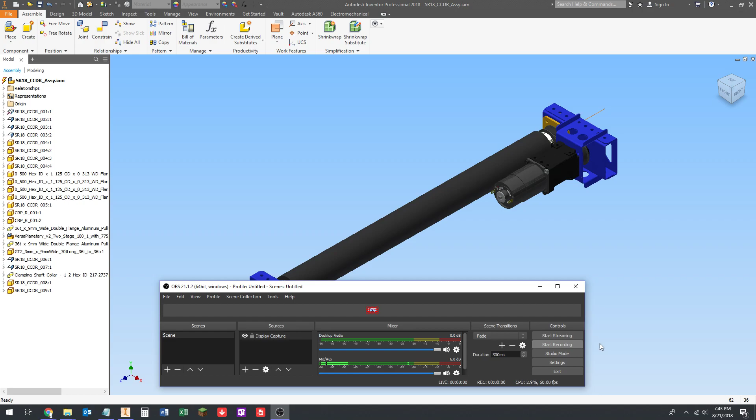Alrighty, we are back with our sixth and final part to this drum roller project for the Stellar Robotics 2018 CAD class. Basically what we're going to be doing is what we've done in the last video of the series of all of our projects: we're going to be adding the fasteners.

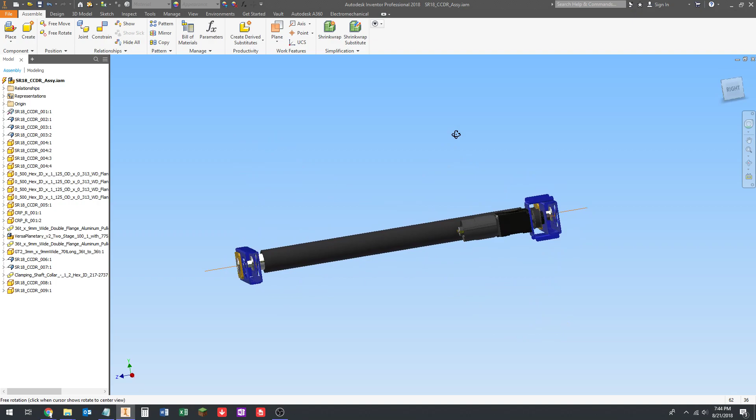Like I've said in the previous videos, we don't normally add fasteners to our CAD models unless they serve some really critical purpose that we need to be able to evaluate in the CAD model. But for the sake of completeness on these, it's a good idea to get in the practice of it for all these projects. And if we have a lot of manpower on the team, it's a good idea to add the fasteners if you can. It's just typically a waste of time if you don't have a lot of CAD people working. So we're going to do it. It really makes the CAD models look nice anyways. So let's talk about what we got to do.

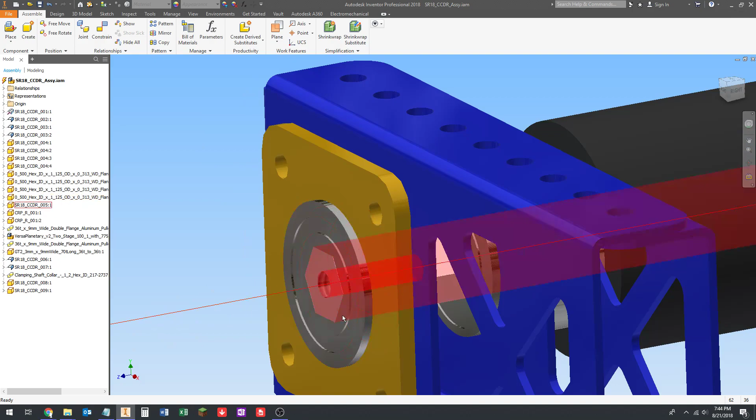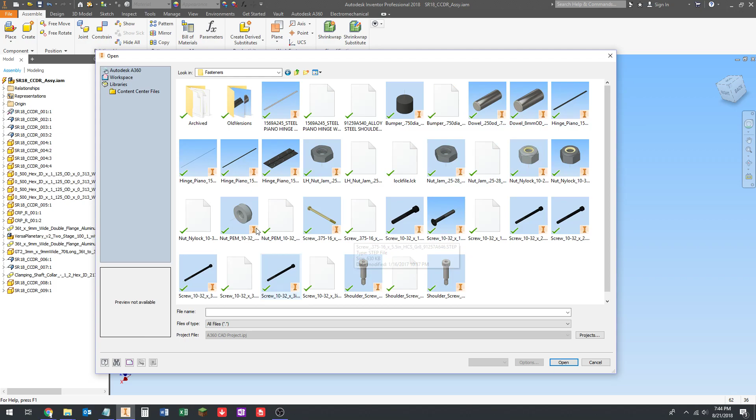So we know we've got to do a 1/4-20 button head and a washer. We've been using 1/2 inch long 1/4-20 button heads here, so we're going to do the same thing. We've downloaded these CAD models before. Normally, when you're working with standard parts, we keep a standard parts folder. I'll just actually show you. We just use Google Drive to keep our Stellar stuff. So we just have a standard parts folder. We've got like a fasteners folder. We kind of just dump random fasteners that we use in a folder. We got a folder for gears. Right, so we've just got a folder for a bunch of different parts.

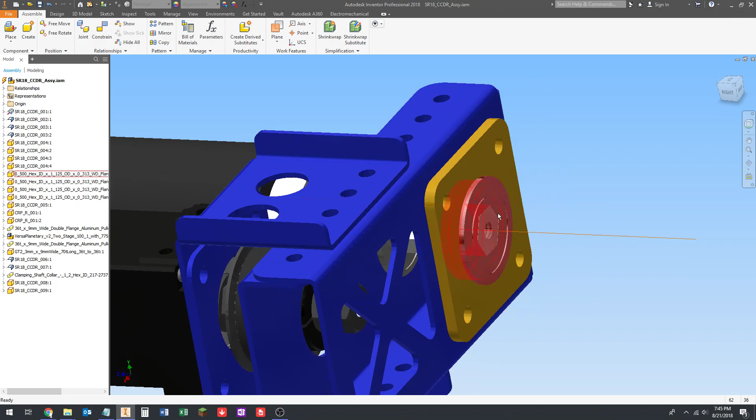And then every model that we do pulls from that standard folder. So normally during a season, you'll download a screw one time, and you won't have to download it again. If you've already downloaded that screw, for instance, you're not going to have to do it a second time. However, for the sake of these CAD class projects, I haven't been doing that. I've been re-downloading the files every time because the file management for doing that whole standard parts thing can get pretty tricky, so I don't want to bother doing it. So we're just going to go and re-download the CAD models again for those.

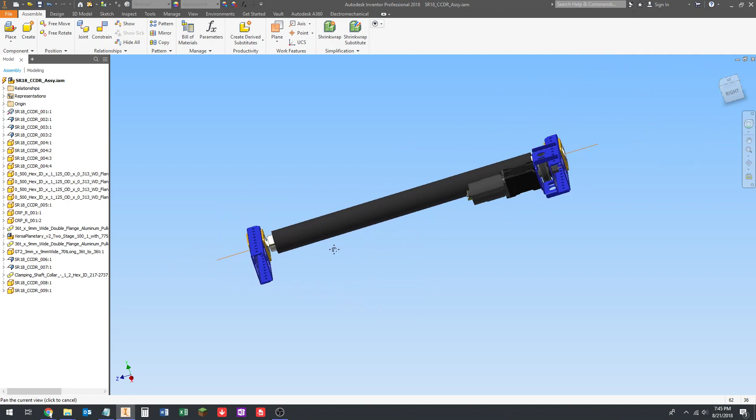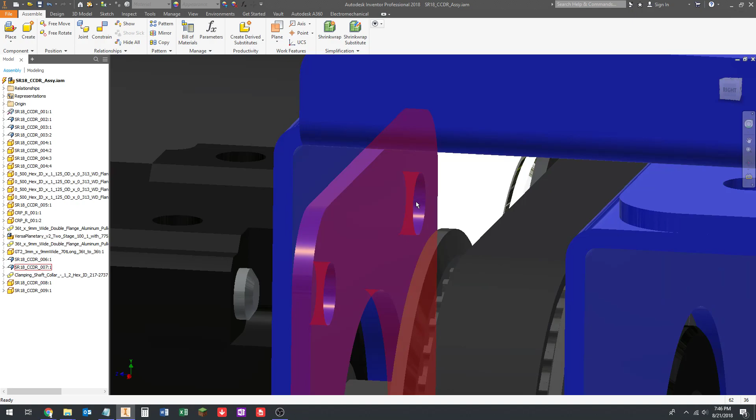And then we're going to need an 1/8 inch hex spacer in here. We're going to need a 1/4 inch hex spacer in here. And then we're going to need mounting screws for the gearbox. They're 10-32s. We're going to use socket heads, and I think we're going to use ones that are 1/2 inch long. That's what we usually do to mount these. I don't think we're going to put a washer under there. I hadn't planned on doing that. Sometimes you might want to. In this case, I don't think there's a reason to.

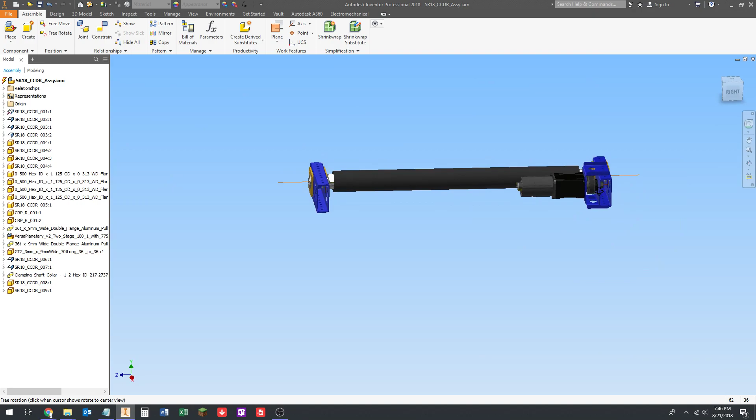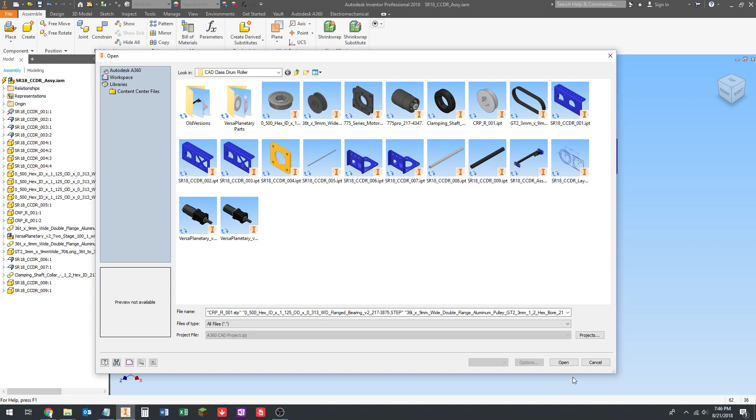Plus, we're kind of crunched for space to avoid interfering with this belt, so I really don't want to add any space in there. So, screw and a washer for this, a spacer over here, a spacer here, and a screw here. So 5 things, if I counted that correctly. If I didn't, it'll be okay. All right, so let's go to McMaster-Carr to download our CAD models. Actually, before I do that, I'm going to go back to Inventor. I'm going to just delete out the step files that we have in this folder already, because we're going to download 5 more, and I don't want them to get confused. So, all right, cancel out of that, go back to McMaster-Carr.

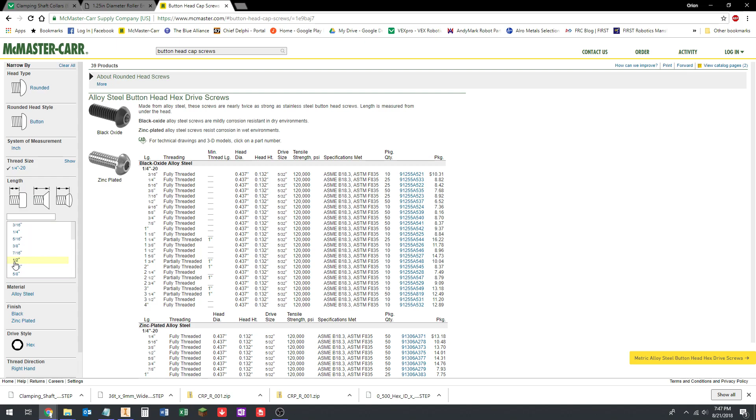All right, so button head cap screws is what we're looking for. They're going to be alloy steel button head cap screws. Yep. The thread size is going to be 1/4-20. The length is going to be 1/2 inch. It's going to be these black oxide steel coated ones. Click on the part number, click on product detail. 3D STEP is what you want in the CAD format. Depending on your browser and your screen resolution, you might have to scroll down to get to this. It might be down at the bottom of the page. I've got a 1080p monitor, so it shows up like this, but your computer, especially on your laptop, might show this page differently. So give that a save.

All right, so now we're just going to go up in the search box. We're going to do washers, general purpose washers. All right, screw size will be 1/4 inch. These 18-8 stainless steel general purpose washers are what we want. So click on the part number, click on product detail, 3D STEP, click save, and we'll move all these step files in at the same time.

Washer. Yeah, it should be okay. All right, so now we need a socket head cap screw. Yep, socket head screws, alloy steel socket head screws. There's all these different categories. I'm just clicking my way through. Thread size, I'll talk about something here in a second that'll be important. So 10-32 for the thread size, and the length will be 1/2 inch.

If you guys have problems, I'm just kind of blowing through this just because I want this video to be short, and we've downloaded these exact CAD models already. If you guys don't want to download some of these CAD models again, and you know you have a copy of that part already, for instance, left over from the gearbox project, you can just copy the files in. I'm fine with you guys doing that. I'm going through this again for the sake of completeness.

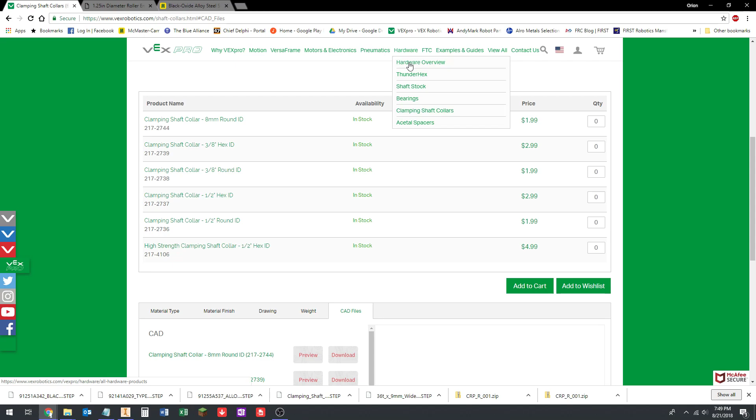All right, so now we need to go get parts. We need to get the 2 spacers that we need from VexPro. So we're going to go back to VexPro. We're going to go to hardware. It's going to be these acetal spacers. We used 1 or 2 of these in the gearbox project. We're going to scroll down to CAD files. So we need the 1/4 inch acetal spacer, 1/2 inch hex. Download that. And we need the 1/8 inch acetal spacer, 1/2 inch hex. Download that. All right, so we got 5 files here.

We're going to right click, show in folder, grab all of these, cut, and go back to our drum roller project folder, paste those in. Normally I would name these files something specific, but the only reason I would do that is when we put them in that standard parts folder that I showed you guys. So for the sake of this project here, I'm going to just leave these the names they are like we have been.

All right, so let's start importing all these. We'll import all of them, get them set up with the materials and all that stuff, and then we will constrain them all. So it looks like this is an acetal spacer, so bring this in, click OK, delete the sketch, set the material to acetal resin black. We're going to have to override the color. We're going to put an axis in the middle. We're going to go to solid bodies to fix the color. Right click on solid one, go to properties, clear all overrides, select the drop down, scroll up, go to as part, click OK. Just like we've done before.

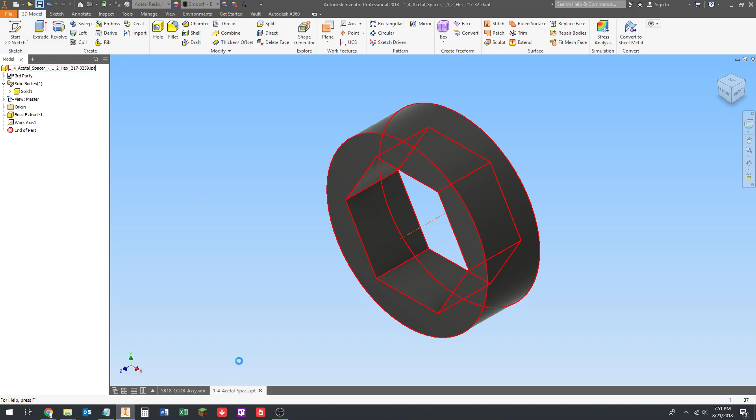I'm going to give that a save and close it. Open, go to the next one, and I've lost my thumbnails again. That's great. I need to get to the bottom of that. I think it must have something to do with either the video recording software or something to do with importing these files. It always seems to happen when I'm downloading something, but more likely it's probably something to do with recording.

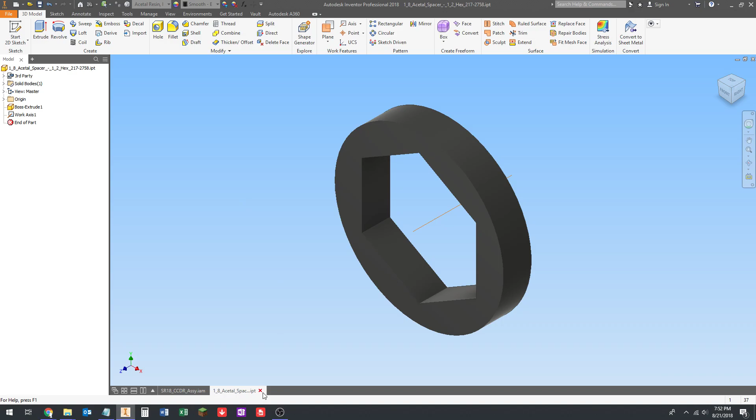Anyways, doing this again, this is basically the same exact part except half the thickness. This is the 1/8 inch one. So we're going to add a work axis, set the material to acetal resin black, and for some reason I didn't have to override the color on this one. I don't know why they were different, but give that a save, close it, open the next one. This is going to be our gearbox mounting screw.

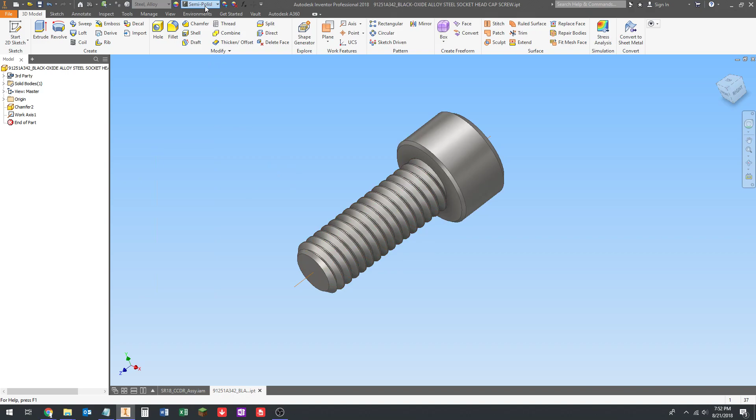Click OK. Delete the sketch. Okay, so we need a work axis. The round surface of the head will work, so click on axis, click the round surface of the head. Click the material drop down to steel, for steel alloy. Yeah, and then the color we're going to set to glossy black. Save that, close that, open, go to the next one.

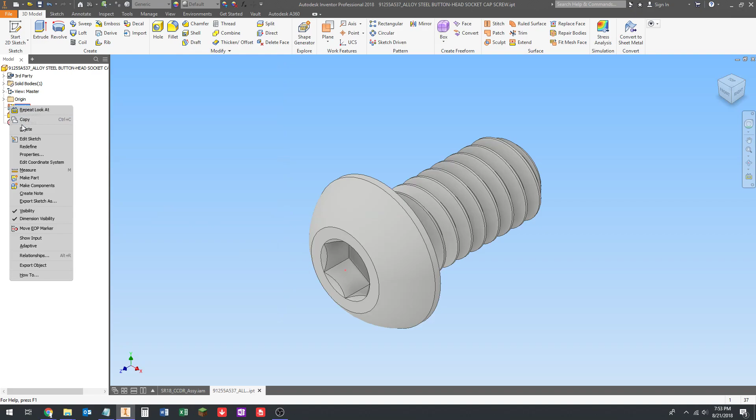This will be our retention screws for the end of the shaft. Click OK. Delete the sketch. Alright, so we need a work axis here. This surface right here works. Once again, alloy steel, glossy black for the color. Give it a save.

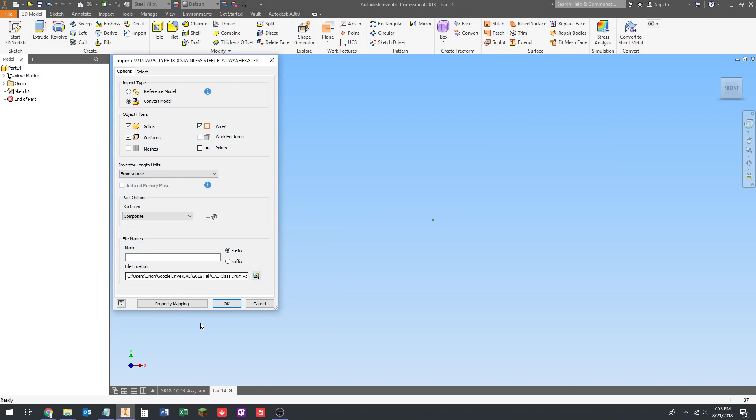Alright, the washer is the last one. Open that up. Click OK. Delete the sketch. Add a work axis. And a stainless steel. This is 18/8 stainless steel, which, if I remember correctly, is equivalent to 304. We're just going to pick that. It really doesn't make a difference.

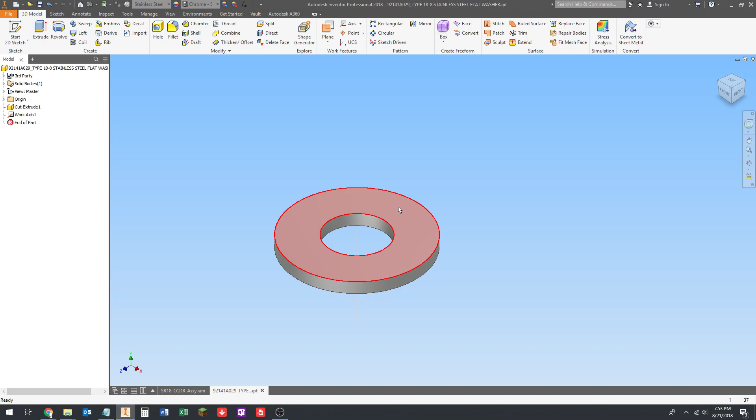It's making this chrome satin. I actually don't care. Normally this would be semi-gloss, but I don't care. So give that a save. Close out of it. All right. So let's start here. We're gonna put the washer on. We're going to put a washer on this end and a washer on this end, and then we'll put the screws on either end. We're going to be using insert constraints for this.

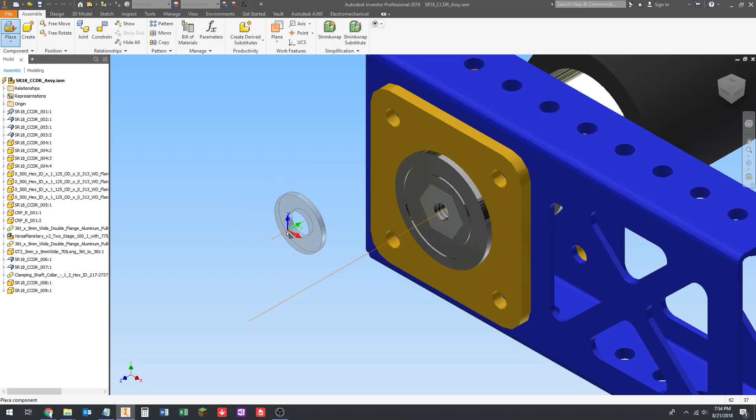So I'm going to go to place component, and I got to try to find this first one. Nice. Okay, so let's rotate this. I'm going to rotate it the other way. Once again, I explained why I rotate things like that in an earlier video, just because of the direction I expect it to be facing. So do that one, and then I'm going to just rotate it around. It's less important for imported components, but it's kind of just habit at this point. It's kind of up to you whether you want to do that or not.

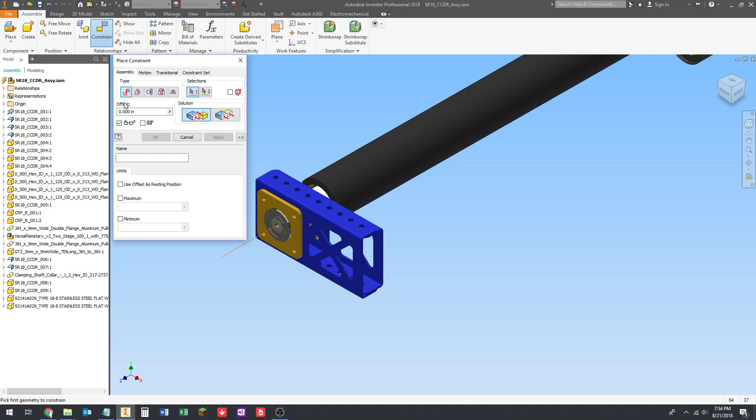All right, press escape to get out of that. Go to the constrain tool, go to insert, pick that side of the washer and the edge of this hole and apply. Where to go? Oops. Pick that. You can pick the inside or the outside circle. It really doesn't matter. Pick the edge of the hole and click apply.

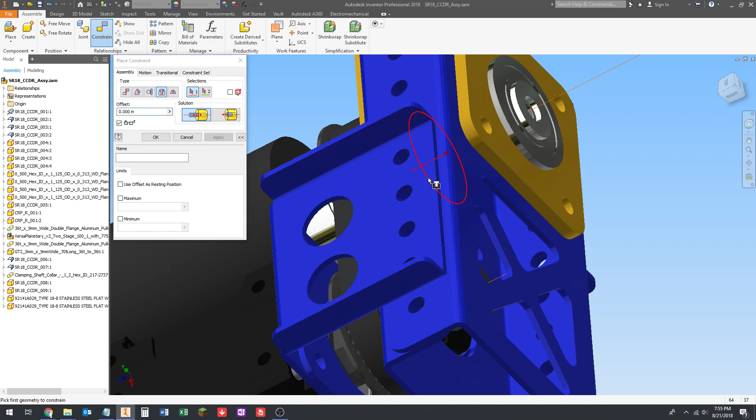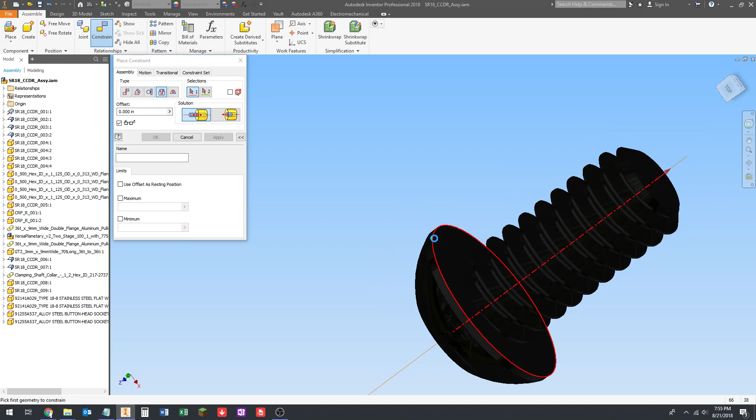Alright, so now we're going to place component again, and that's the socket head. That's the button head. Got to do this without previews. Rotate this around. So we've got one on either end. So we're going to go back to constrain, go to insert, pick this circle here. It's a little hard to see because it's black. It's even harder if I hadn't picked glossy black. You wouldn't be able to tell, which is why I use glossy black, even though these fasteners aren't particularly glossy.

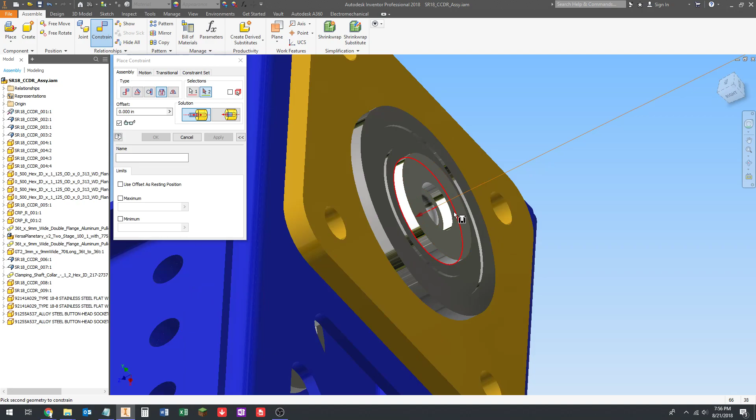All right, then we're going to pick the hole of the washer, not the hole of the shaft. The hole of the washer could be the outside one or the inside. Doesn't make a difference. All right, then we're going to pick this ring at the underside of the head on the other one and do the same thing. Okay, so that's all well and good. All right, so now let's put this spacer in here. That should be fairly straightforward.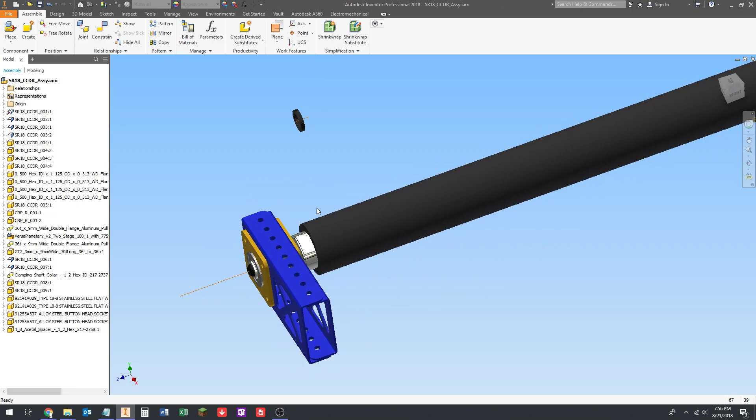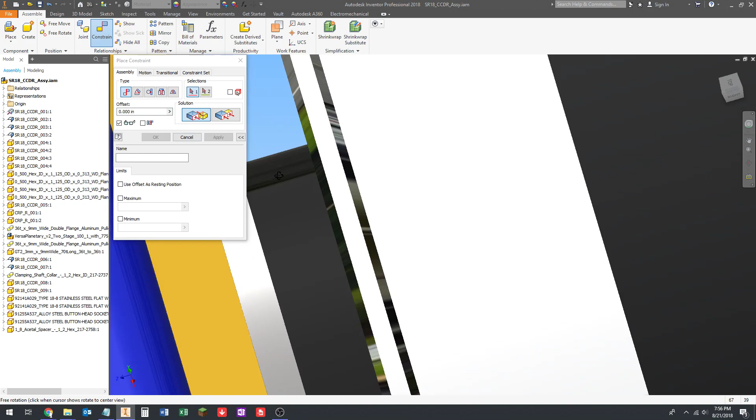It's going to be this 1/8 inch acetal spacer. All right, technically there's a way to use the insert constraint on this, but I'm not going to do it because I don't want to deal with it. So constrain, I'm going to constrain the work axis to the axis of the shaft. And then I'm just going to constrain one side. You can either constrain one side to the end cap, or you can constrain it to the bearing. I'm going to constrain it to the end cap. And you can see that it's just the perfect size to fill that gap. It's almost like it was designed that way.

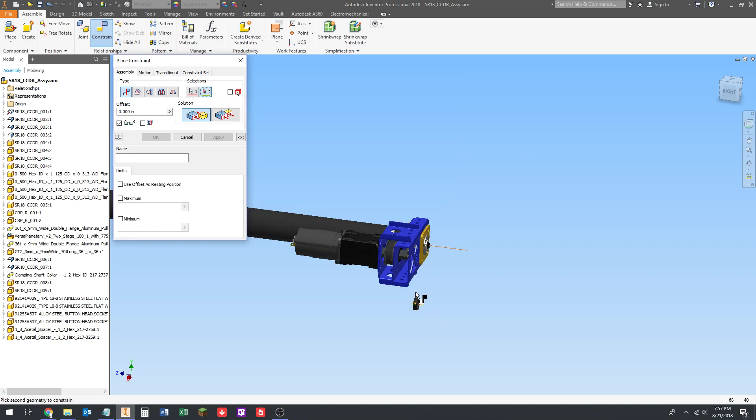Alright, so over here, we're going to do kind of the same thing. We're going to place component. We're going to grab the 1/4 inch one, place it down. We're going to constrain the work axis to the work axis of the gearbox, which is this guy right here.

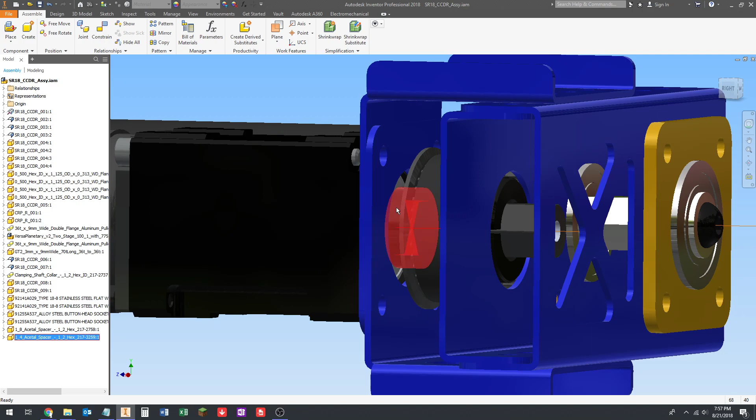Click apply. Then we're going to constrain one side of the spacer. We could either get in here and constrain it to the end of this gearbox hub, or I'm going to constrain it to the end of the pulley hub. And then we can kind of get in here and see that it should be relatively well lined up. I'll show you a trick that will help us confirm some of this stuff once we're done.

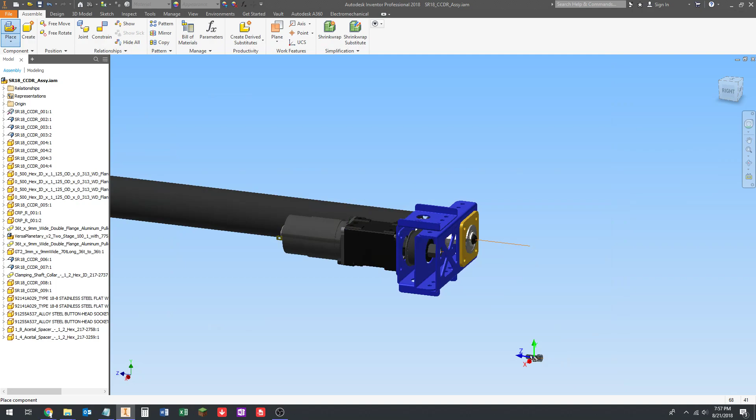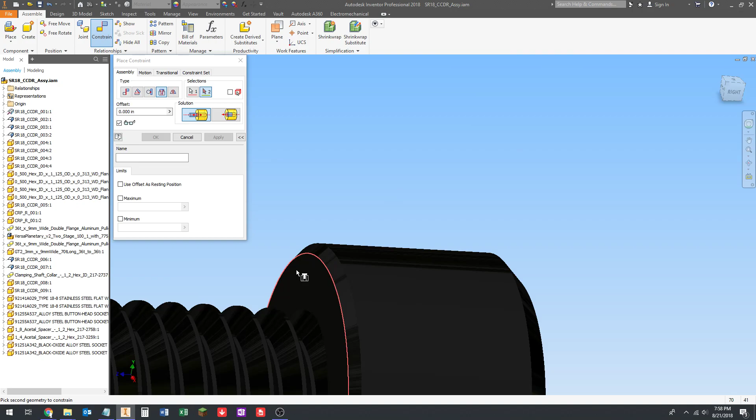So we got one more fastener to place. Let's place component. Should be black oxide alloy steel socket head cap screw. That's facing the right direction already, so we need one there and one there to go in this hole and that hole. So let's just pick the constrain tool, go to insert, pick, it can't be this circle, it has to be this circle, because there's a little bevel there. You need to pick the one that's closer towards the end of the screw.

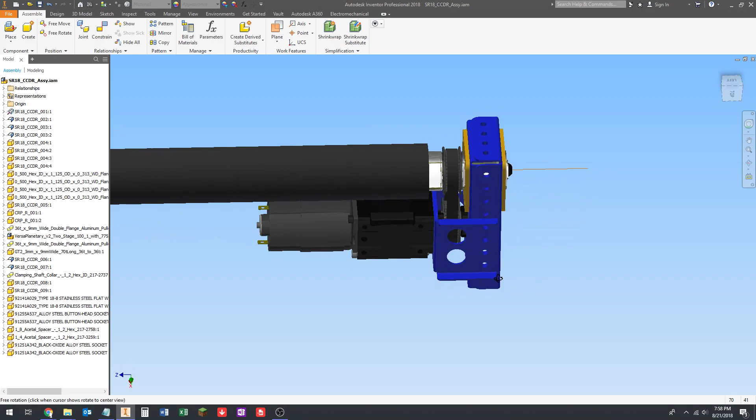Alright, and pick the edge of that hole and apply, and edge of that fastener to the edge of that hole and apply. All right, and that's it. That's all the fasteners. Other than that, most of the other fastening done in this assembly is accomplished with rivets. The bearing blocks are in place by rivets. All the structure is with rivets.

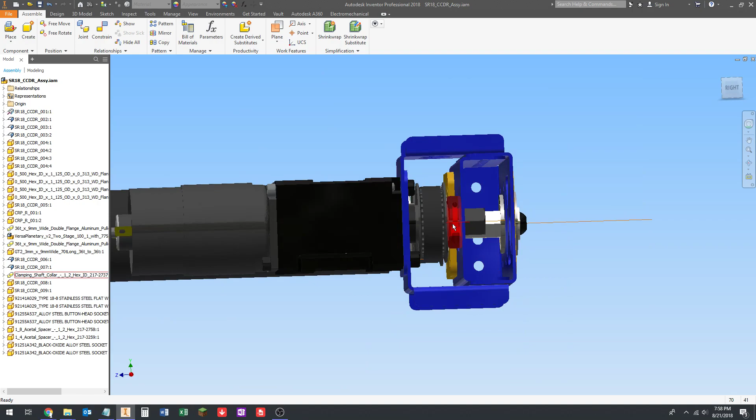We obviously have the shaft collar in here, which technically is a fastener. However, it's an important enough fastener that I would never leave a shaft collar out of an assembly. I would always put the shaft collar in. Whereas in a lot of cases, I would leave spacers out, and I would leave these screws out just because of time, typically.

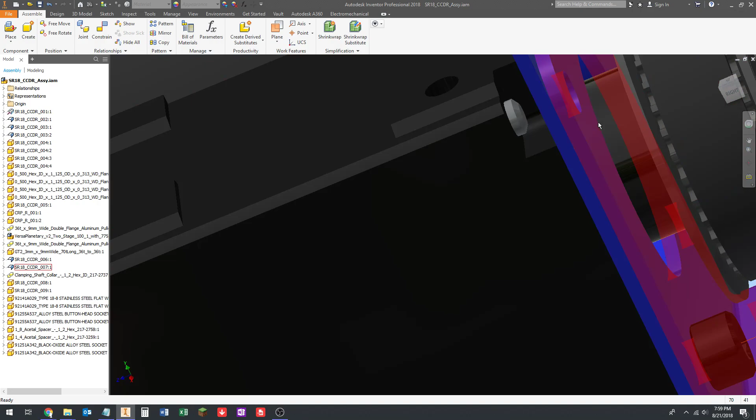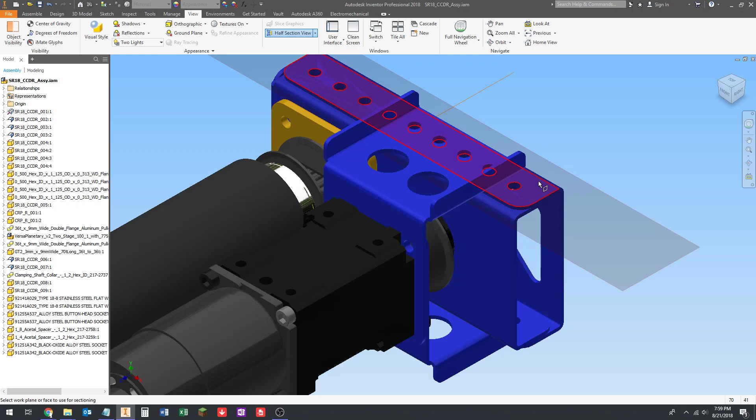So I wanted to show you guys just one other thing. Some of these fasteners in here, like this one, it's hard to tell if it's actually positioned correctly. So you can do what's called a section view. If you go to View, where it says quarter section view, click the drop down and go to half section view. Then basically you need to pick a plane. You can do this a couple different ways. You can click and drag on a plane, and basically you can cut the assembly.

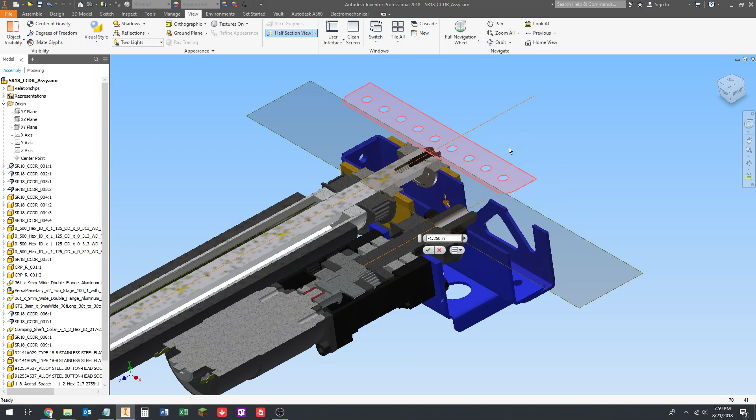You can look at it, and once you let go of the mouse, you can type in your dimension here. Now we know the distance from the top to the bottom of this is 2.5 inches. So 1.25 or negative 1.25 is exactly in the middle. You can also go to the origin, and you can pick one of these planes and use that to split it. Up to you. But if you click OK, it'll stay this way until you end it.

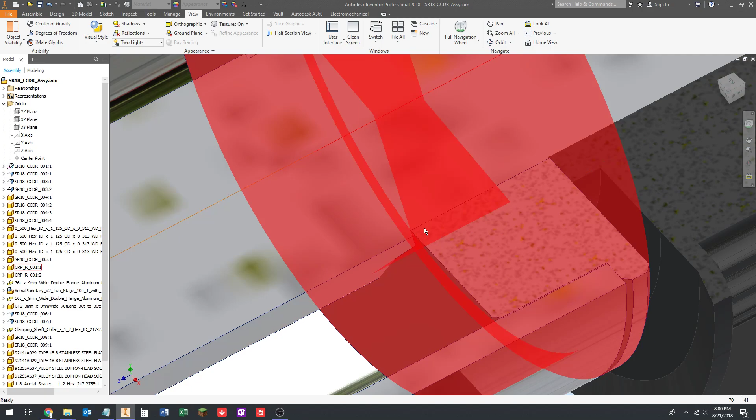So you can see, here, our end caps in place. And actually, sometimes it's helpful if you switch the visual style to shaded with edges, because then you can see the actual borders of stuff. The hexes look like they overlap because the hexes are not lined up. But you can see here, this is our gearbox, this is our pulley, that's our spacer. Everything's lined up just the way we want it.

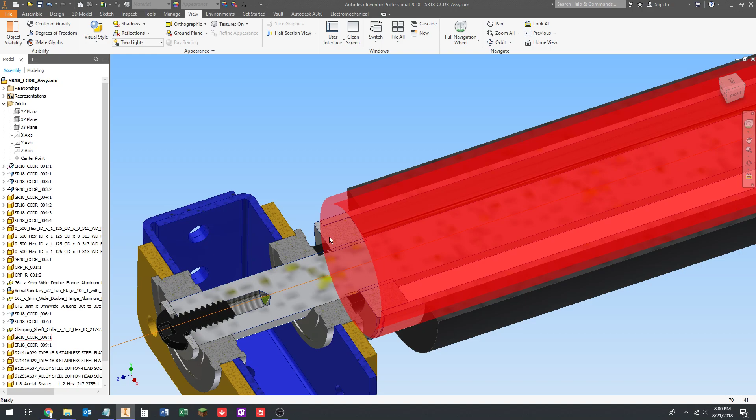And this is a real cool way to look at stuff and make sure everything's lined up the way you want. You can see we've got the hex shaft going through, we've got the end caps on either end, and then the tube in the middle. So this is a pretty good way to look at things. If you need to split through the middle, looking at these section views can help. And you can section view it multiple ways. You can also do a quarter section view if you wanted to slice it in another direction as well.

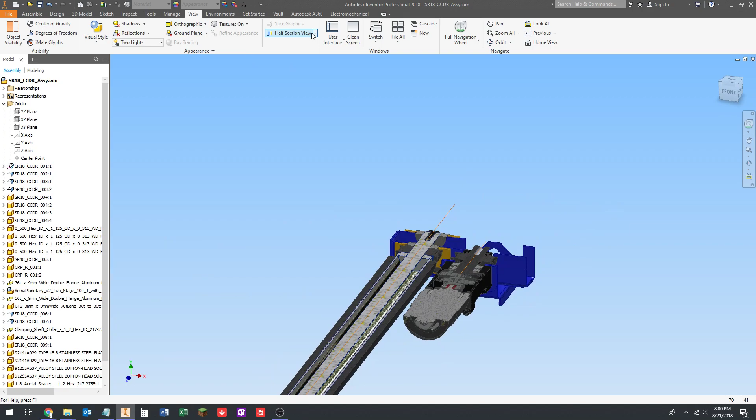But to get out of this view, you just click the drop down where it says half section view now, and click end section view, and it'll take it back to the normal way. And I'm going to switch the visual style back to shaded.

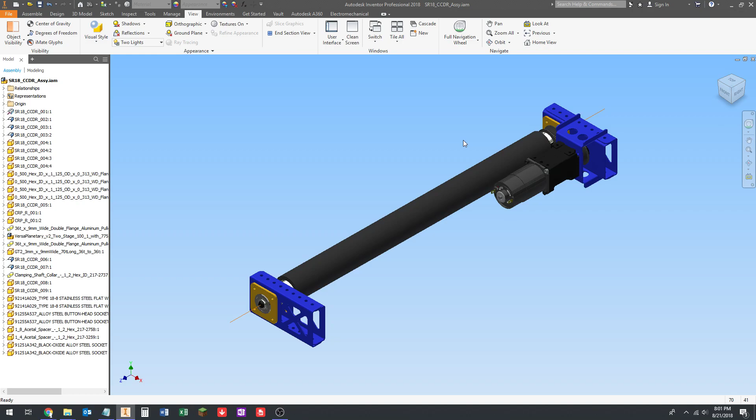Alrighty, so that is it for this project. This is a pretty good representation of how you would drive a roller on an intake for a design. Every robot's going to be a little different, but this is one way you could do it. This is a pretty good way to do it.